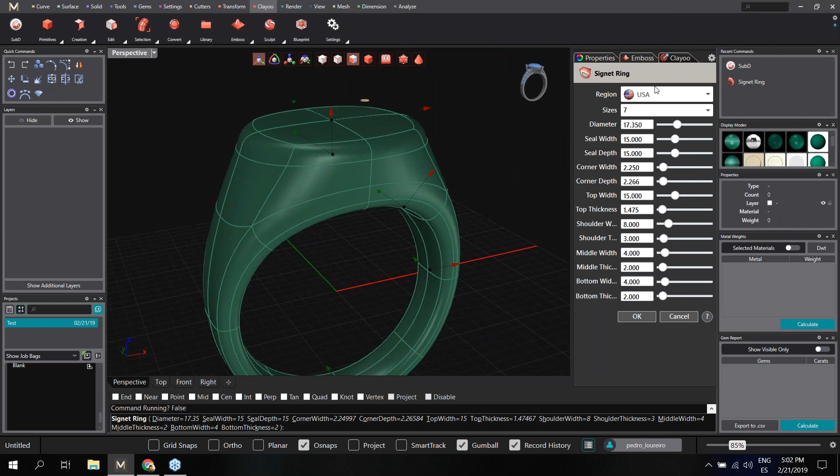I'm going to start with a ring. Under Creation, we have this Signet Ring option, so I'm going to define my ring. We have here all the different options to define the size, the ring size, and of course the measurements.

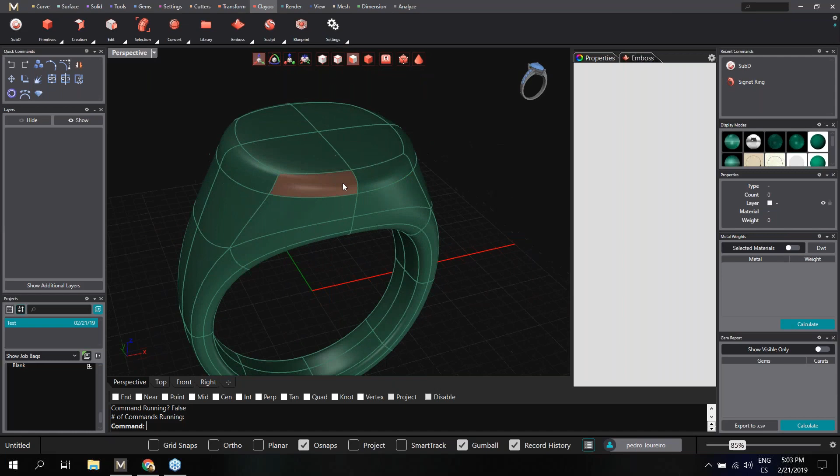At this point, I'm going to keep the default settings. It's okay, and I'm going to work a little bit on the details. First thing I want to do, since this is a solid ring, is create a recessed area in the top to then apply some relief.

Now, since it's a solid ring, I'm going to hollow it. So I'm going to select the inside faces. You'll see we have here the different selection mode types. At this point I'm on faces selection mode, so we can select all the faces.

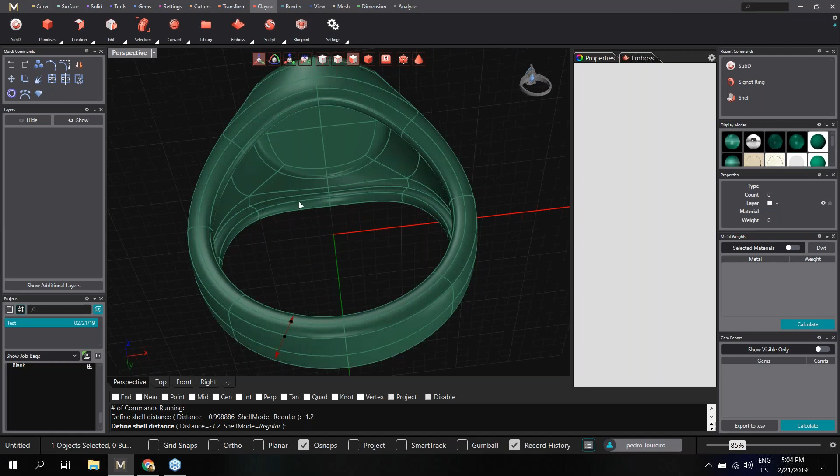In this case, these are the faces I want to remove, and so with all the other ones. Now I'm going to use the Shell tool, found under Edition. Here it is, Shell, and it will automatically delete the selected faces and try to hollow the ring. We can define the thickness, or directly in the command line type the measurements we want. So in this case I define the thickness, and it looks good.

Of course, we'll be able to work a little bit more here. I just want to push the inside down a little bit, so I select these four faces. You see that automatically the gumball appeared, the Clayoo gumball, on the faces, so I can push these faces down a bit. We can check in the front view exactly the position.

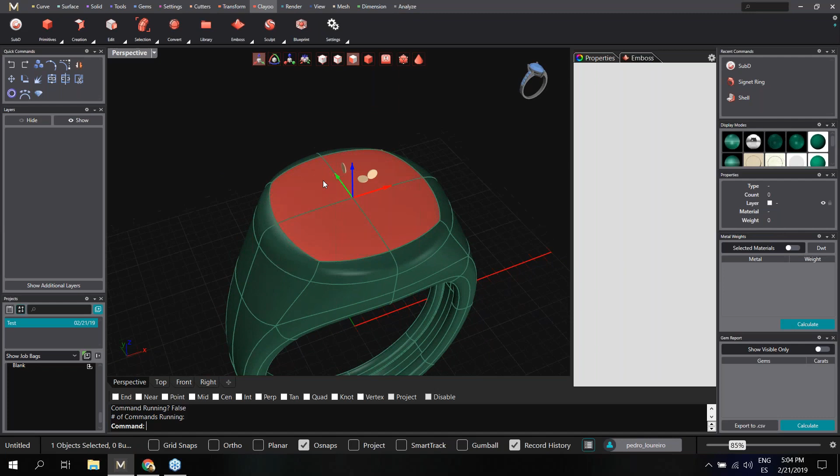All this is because I want to create a recessed area here in the top. So maybe the first thing I'll do is select this loop of faces and divide them, creating a division here in the top. So now I'll divide, and we have another division here in the top, which will let me move this down.

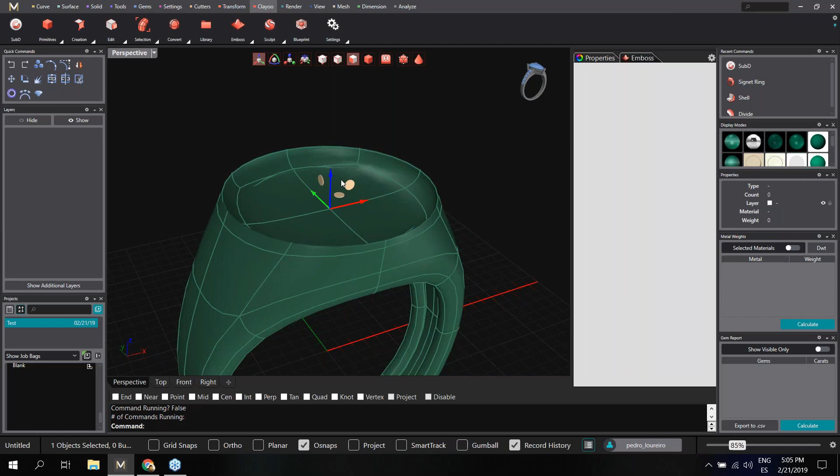You'll see why I created this division: when we move this down, a very sharp corner appears here. So this division allows me—now going to edges selection mode—to scale with the gumball, in this case a 2D scale, a little bit inside, and you'll see this becomes more smooth. So we're looking at more of this kind of shape.

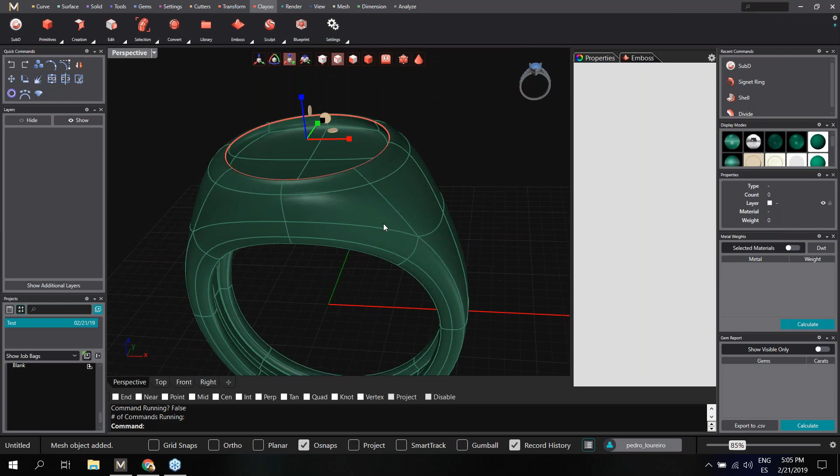After this, I'm going to adjust a little bit more on the inside faces. I can select them and once again scale a little bit, just to make this wall exactly as I want. So now you can see the shape we have here—it's the solid ring.

For this part, what I've been using so far is sub-D. In Clayoo, if you're familiar with it, we have three different possibilities or technologies that allow us to model. This is the first one, subdivision, and we also have emboss, mainly for reliefs, as well as sculpt. In the last webinar, I focused mainly on the subdivision tools.

In this one, I'm just creating this ring with the subdivision tools, and now we will create the other parts using the other different technologies.

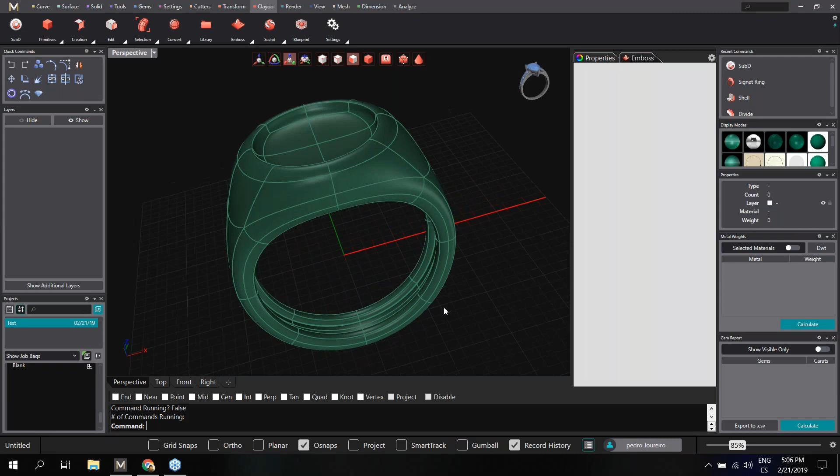Back to our model: since I have the ring, the main body of the ring, done, I can turn off sub-D. I just click on the sub-D icon, which means I no longer have the Clayoo toolbar in the viewport—this is disabled. You can see now my object is a regular mesh.

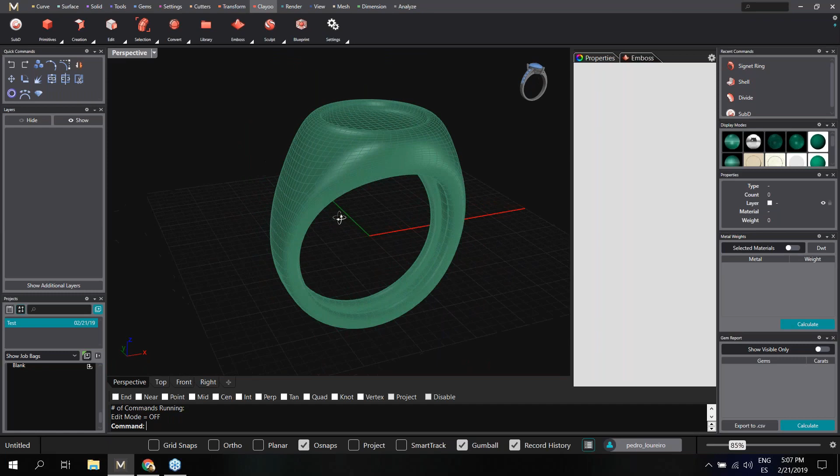If anytime we need to come back to the edition mode, we just turn on Clayoo again, and you will be able to come back to the edition. Otherwise, at this point, I can hide it.

What I'm going to do now is hide it, and create the relief on top using the emboss tool. The emboss is also part of Clayoo, and it's based on curves. So before applying the reliefs, we need to have the design or curves done in Rhino first.

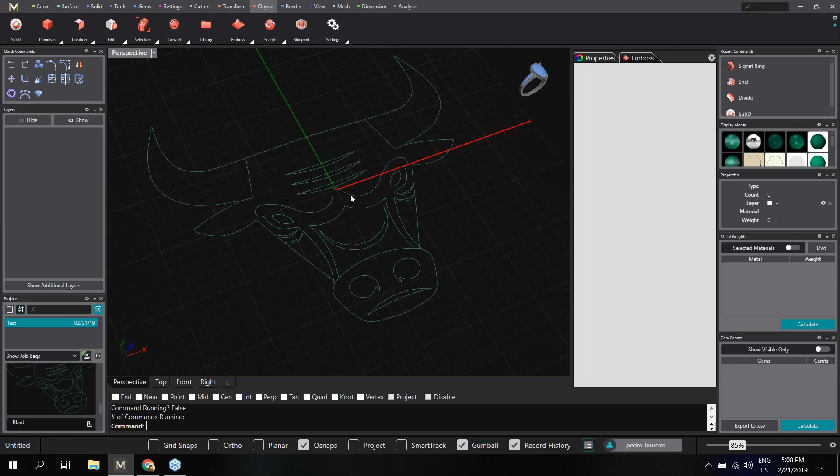I've already created some curves here. These curves are flat, as you can see, and the idea is to apply some reliefs to them, then place this object on top of the ring. So mainly what I'm going to focus on now is the emboss tools.

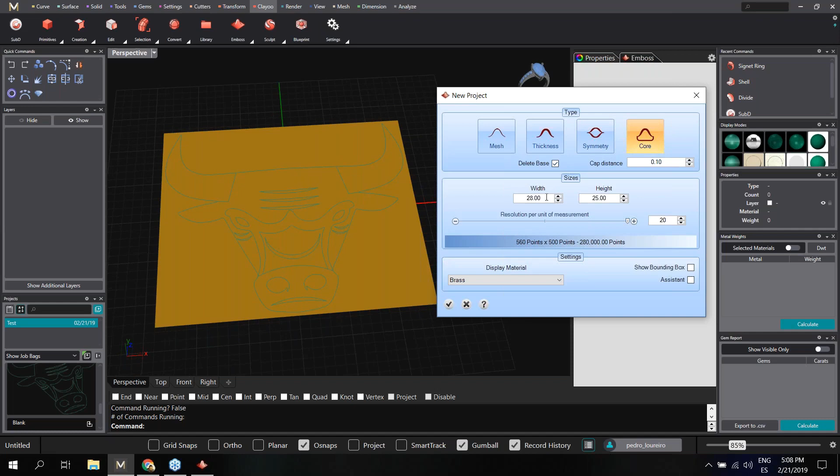First thing is to turn on the Clayoo emboss, and it will ask us to define the project settings. Mainly what we can define here is how we want the result - it can be a mesh with thickness, symmetric on top and bottom, or a flat cap in the back. We can also choose this rectangular area where our curves are in, so we can adjust, as well as the resolution.

Once the project settings are defined, remember that at any moment we can come here and adjust whatever we need. So I can start now with my reliefs.

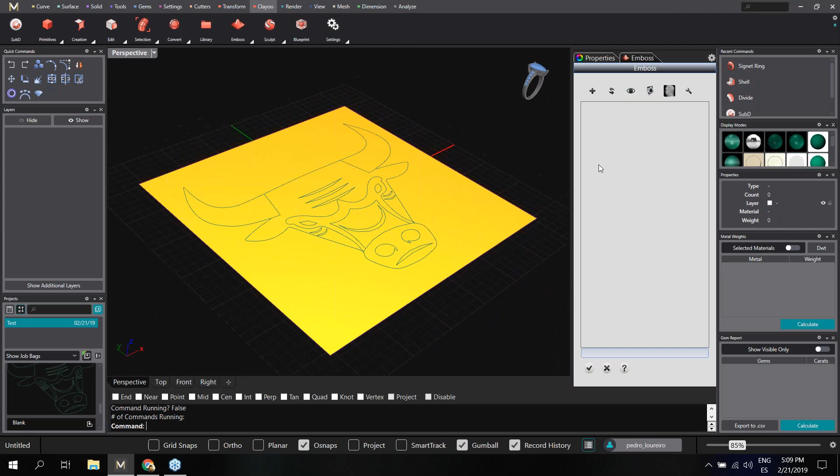You will see that now with emboss, we have all the options right here on the side panel, and it will work with operations. So we need to add one operation. In this case, we have one operation here, but we need to define what it is and where it will be applied. So what I'm going to choose is the operation type, and then the operation curve.

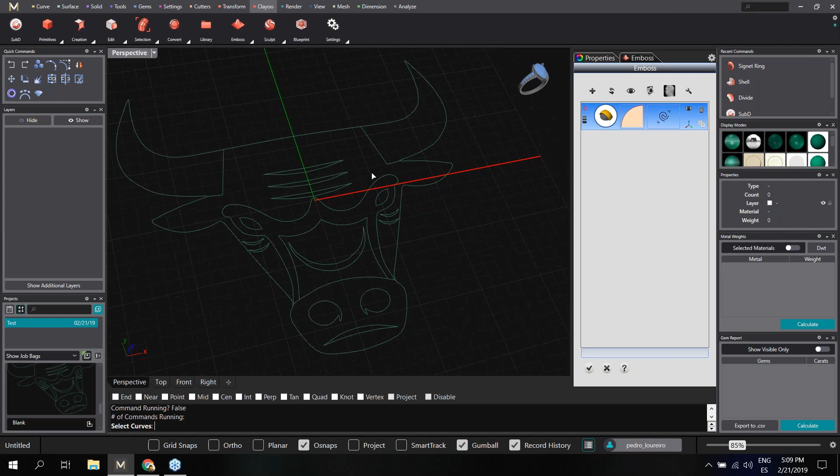If I click on the curve, I need to select one curve to apply this operation. So I select one of these curves, in this case the outside curve, enter, and it will show us this profile. As you can see, we can adjust the height and the profile exactly as we want, and it will be applied to the selected curve. So I just refresh, and as you can see, the result from this first profile is here.

The idea is to keep adding more and more details, in this case based on these curves. So what I'm going to do next is add another operation, and now the curve I'm going to select is, for instance, this one.

Exactly the same process - I just define the height I want, and the profile. We have a huge library of profiles you can choose from. I'm going to keep using the default one, and once again I just refresh, and you will see it creates our second profile. If it's too much, we can adjust, and then we'll be able to clean all these edges.

So I'm going to keep going. We can hide the previous gumballs in each operation. My next step now will be the horn. So I select this and this, enter the height of the curve, looks good, refresh, and we have here the horns. So as you can see, operation by operation, curve by curve, we are adding our details to the model.

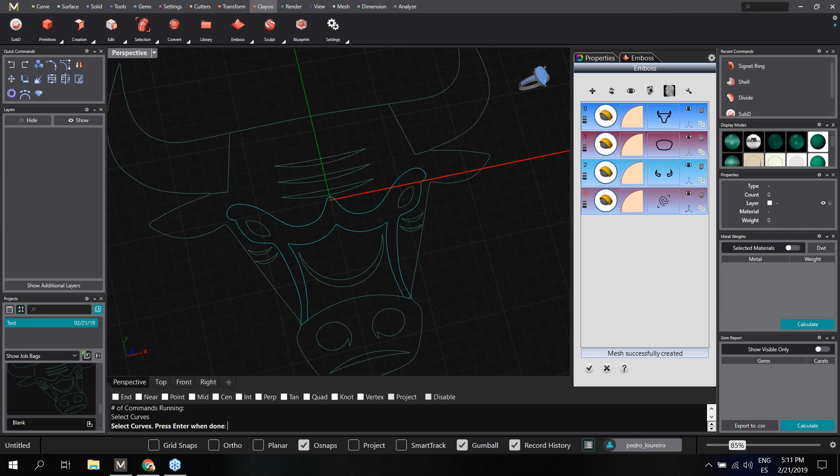The next one we're going to do will be this curve. So I will select this curve and enter here. And now once again I can add the profile, in this case a little bit, and refresh. As you can see, we are adding our details.

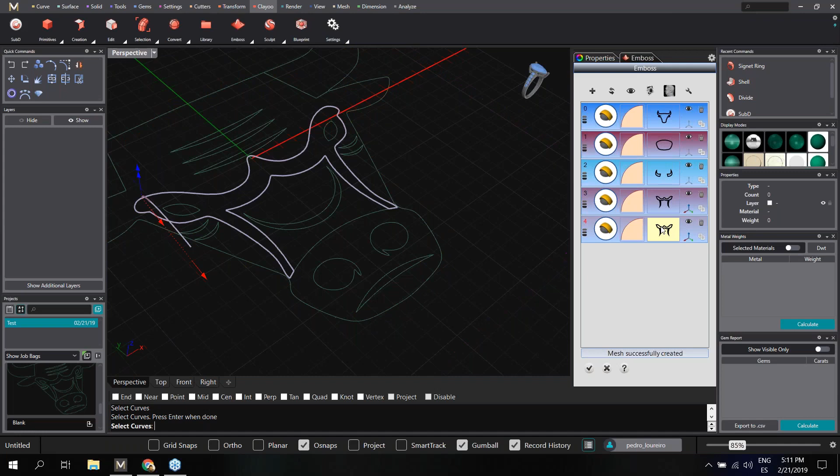Now I'm going to add another one. The funny thing is that instead of adding to raise the relief, we will go in the opposite direction. So I'm going to select the curves, this one and this one, enter. Now what I'm going to define in the settings is, instead of add, I'm going to define subtract. This means it goes down, so I can define my profile here, refresh, and as you can see now it's this kind of detail you can keep playing with.

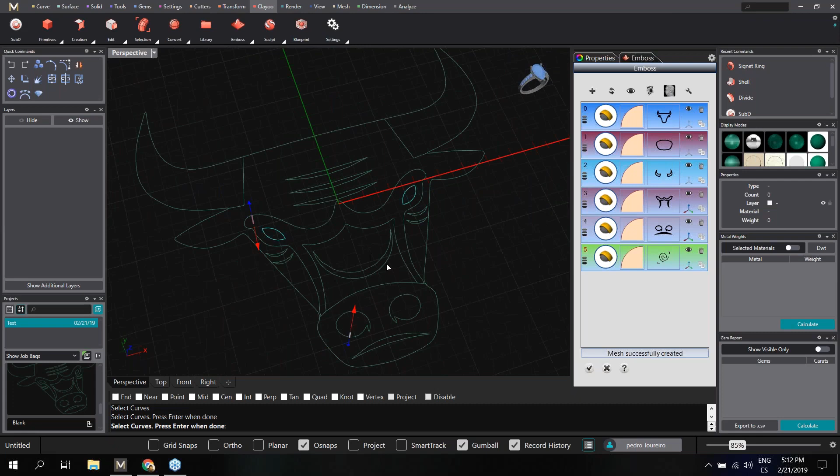So the next step, I'm going to add the eyes. Let's select the curve. As you can see, always the same process - select an operation, and then the curves you want to use in this operation. In this case, in the project settings, I will do the same, subtract, and here we go with a profile, refresh, and as you can see, this is the result.

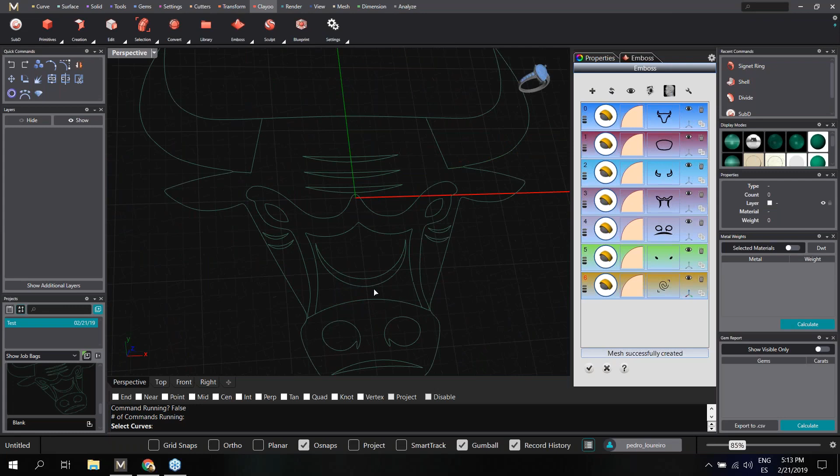So the last ones - I believe it's almost done, and we will define the last touch details on the sculpting. So here I can add one more curve, and I'm going to add this one, these ones, and finally these ones. So now I believe all are ready. Just adjust the profile, height, and refresh.

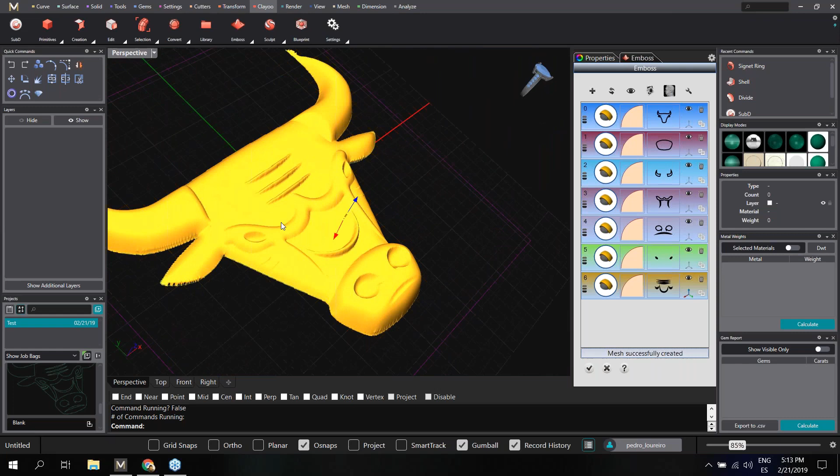All right, so looks good. Of course, we could increase the height, refresh again, and see if it needs any adjustment. But it looks like what I was looking for. Of course, I'll adjust the final details with sculpting and some brushes.

So from the emboss part, this is mainly what I wanted to show you, what we can do with emboss tools - this kind of relief that we are creating. So finally, to finish with emboss, I just click OK to apply.

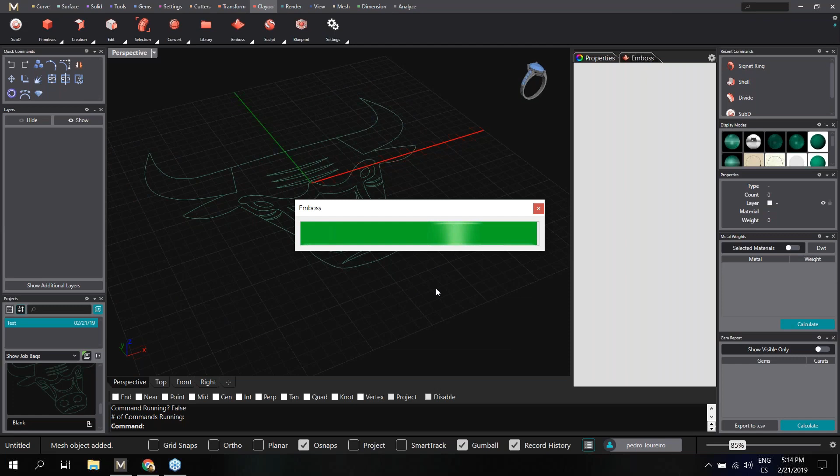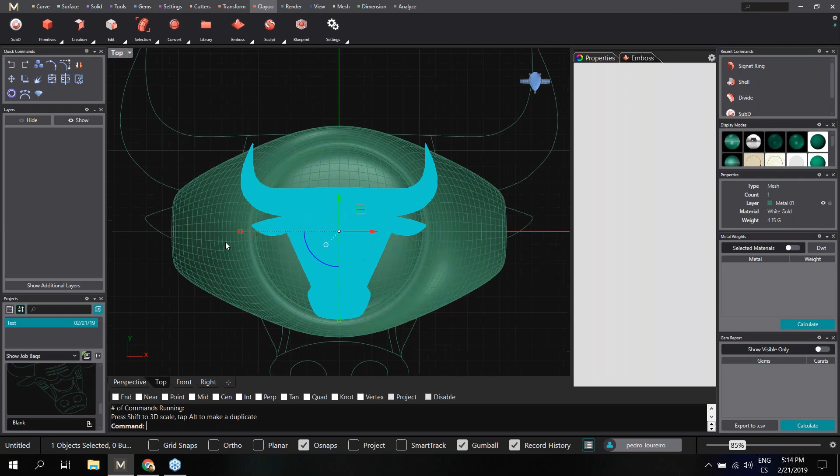The object to the document. Now what I'm going to do is bring back the ring and adjust the scale of this object to be on top of my ring. I wanted something like this. Here it looks good, and of course we need the position here too. I think we are okay.

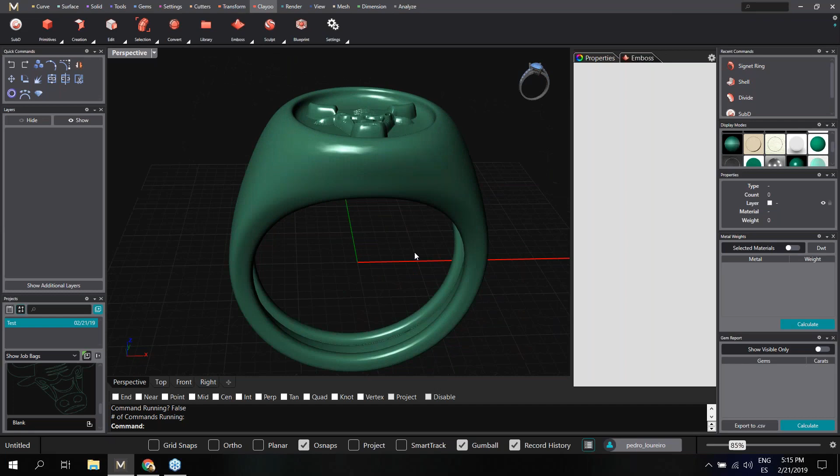Let's take a look at the perspective. Of course, here we can barely see it because the mesh is very detailed, so I'm going to change the display mode. Maybe this one will be better. And we are very close to the result I wanted to show you.

What I also want to do now is use the sculpting tools. So the sculpt, it's here, the sculpt menu. We just enable the sculpting. In this case, let me just select the object - the object I want to sculpt will be just this.

Bull head. And you'll see that now, in this viewport toolbar, we'll have some brushing tools. So the idea is to use these brushing tools on our model. Let me just see if I can show.

You can see here this is the mesh resolution. In some display modes you can see it. This resolution is more than enough to start sculpting. If the resolution isn't good enough, I recommend subdividing here - you can always increase the resolution. But for this case, as it's okay, I'm going back to my display mode.

And I'm going now to the smooth tool. First thing, I'm going to smooth. We can increase the radius and intensity of our brush, and also make it symmetric. So I'm going to start now with these brushing tools.

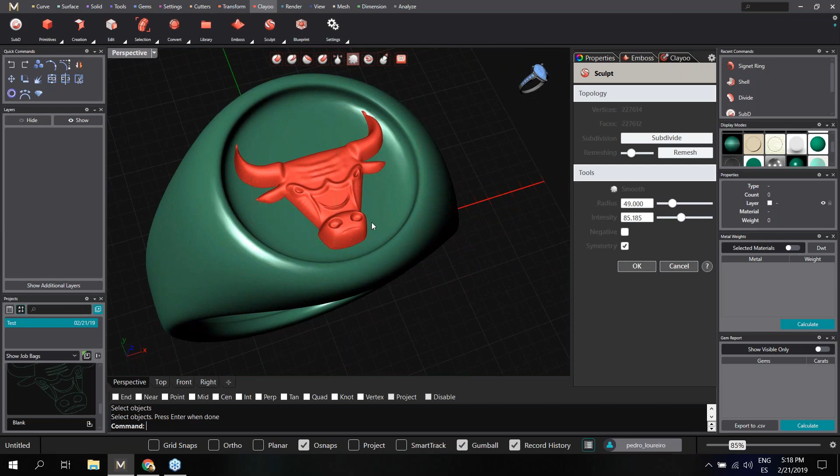So mainly these are the three different possibilities inside Clayoo. I really hope you enjoy it. If you're looking for a tool to design your organic models, I believe Clayoo will be a very helpful tool. So I just click OK, and here we go.

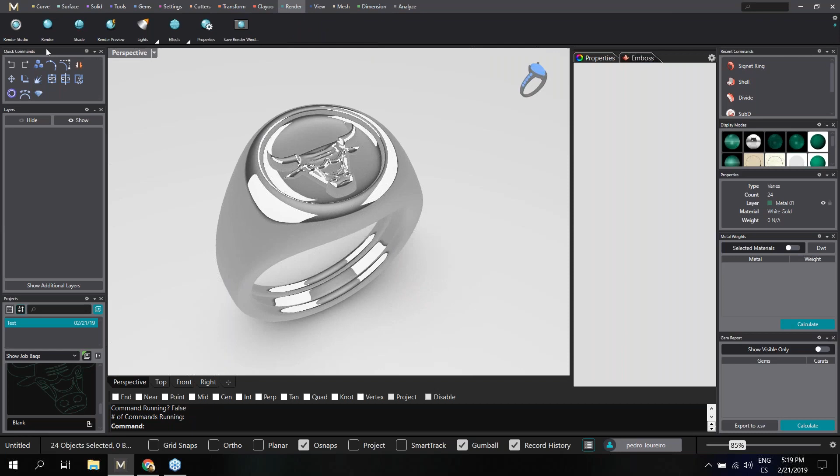This is the result. We could create now a nice rendering here. Let's just hide these curves and maybe apply some materials.

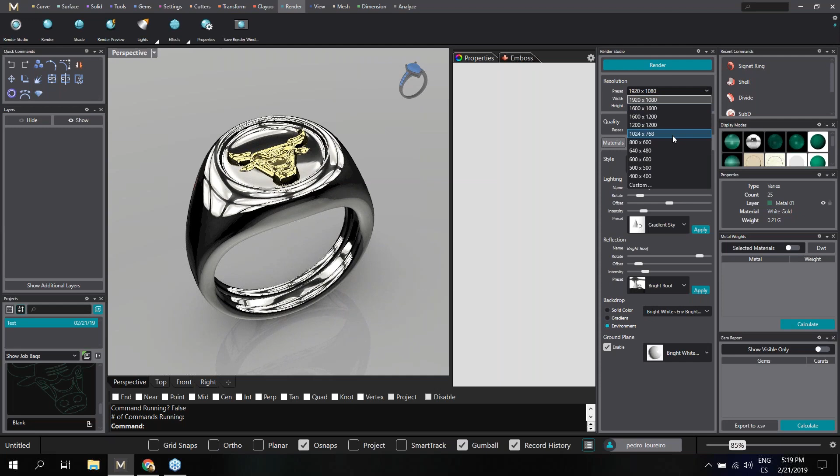For instance, in this one we could use yellow gold, and then set the environment. As you can see now, we could define the render resolution. Let's choose some nice resolution, the position, and render our model.